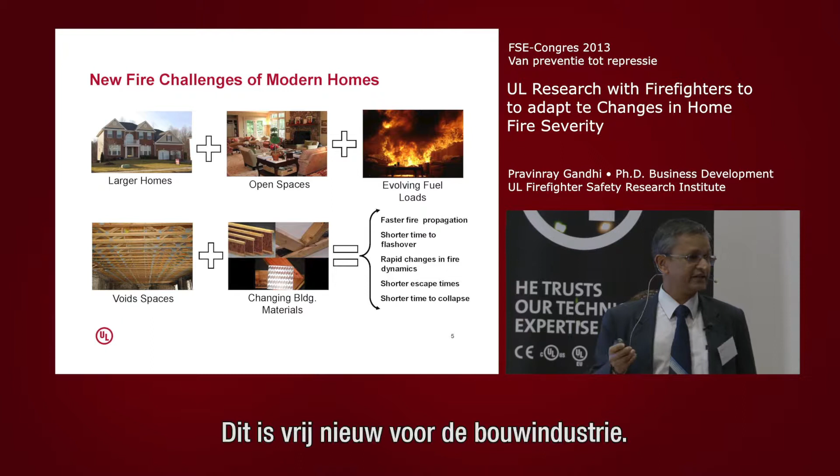So what is happening? Well, several things have happened in the last 15 years. This is relatively new for the building construction industry. It's not the iPhone in our timeline, but in our timeline it's considered to be pretty quick. In the US anyway, we are seeing much larger homes, more open spaces. So when you build larger homes, you try to create more open spaces, so you have the image of grandeur, for example.

The type of materials we have in the home is also changing rapidly. And again, the construction techniques are such that we have much more open spaces, so that if fire were to start, for example, in this structure, it can actually travel unimpeded by natural barriers you might have in your smaller contained rooms, from one end to another end, because you have all these open spaces.

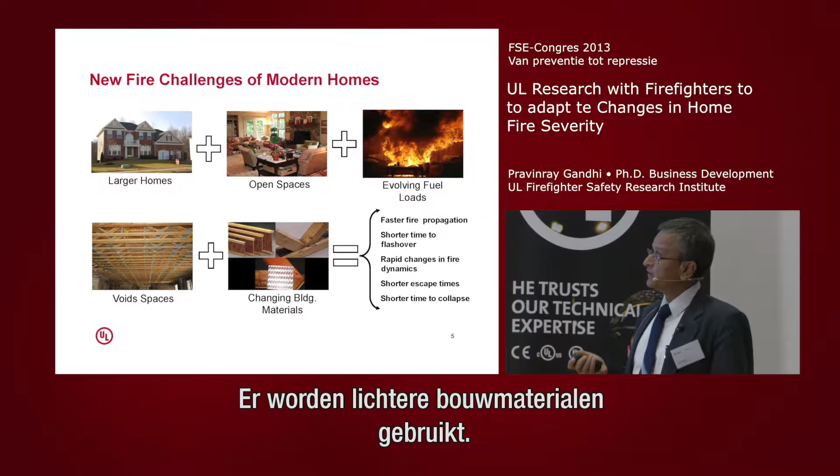And finally, we talked about changes in our construction method. We are going to lighter engineered products that are actually better in so many ways. It actually uses less wood, for example, for the same strength properties. In fact, they are lighter, so your transport load is less. So therefore, you're consuming less fuel transporting these pre-manufactured items to a job site. And that also saves fuel, and that's a great benefit.

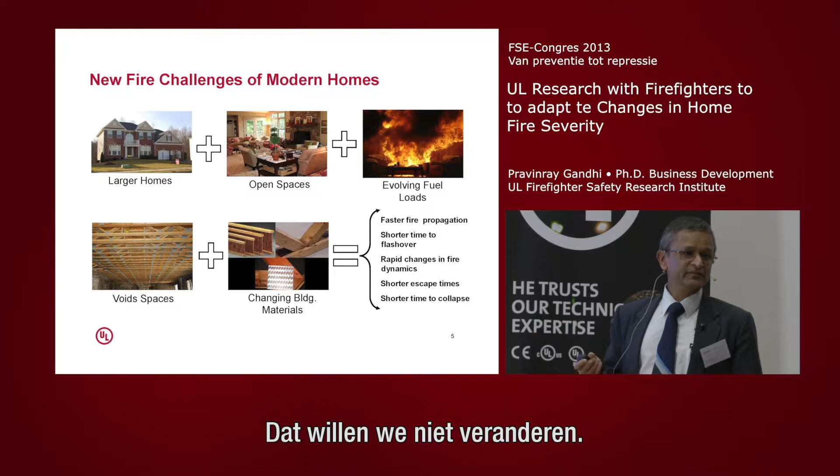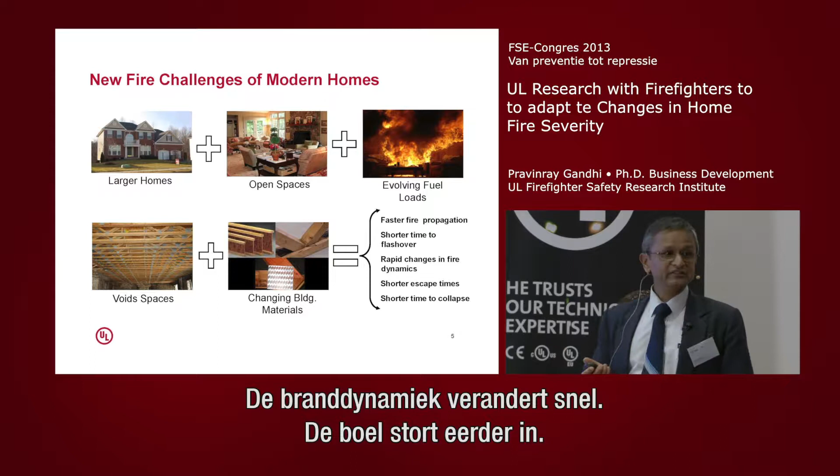So we don't want to change any of this, but we want to understand what it is, and we want to understand the impact of these changes on the fire service. So typically, we notice faster fire propagation and shorter time to flashover, rapid change in fire dynamics, shorter time to collapse, and these last two have a big impact on the fire service.

An idea of the size statistics. In the 1970s, typical homes were small, what we call ranch style, single-story homes, about 1,500 to 1,600 square feet. I remember when I first joined UL, one of my projects was to do risk assessment of homes in the US. This was back in the 1980s, and we were looking at home sizes of about 1,500 square feet. Today, you'll find homes are more like mansions.

Even for me, this is a big home, but this is turning out to be fairly common in many parts of the US, to build big homes. Smaller lot size, but big homes on the same plot size. Getting to be more than 3,000 square feet now on average, which is a pretty significant change.

Now, how does that change things? Well, for one thing, you have more air available than you had before. So even when you have a fire, the fire doesn't become ventilation controlled that readily, but it can grow. It can become much bigger before it becomes ventilation controlled. So that's a change in fire dynamics that comes out of having a larger home.

Some typical floor plans. I show that only because I wanted to show there's this concept of a great room in the US these days, where as you enter the home, you have a very tall atrium space. Your ceiling is about 17, 18 feet high. When you get in, you feel, wow, you come into a Hollywood mansion, right? And that's the impact I think the builders are trying to give the building owner. And then also the rooms are relatively larger because the overall floor plan is bigger.

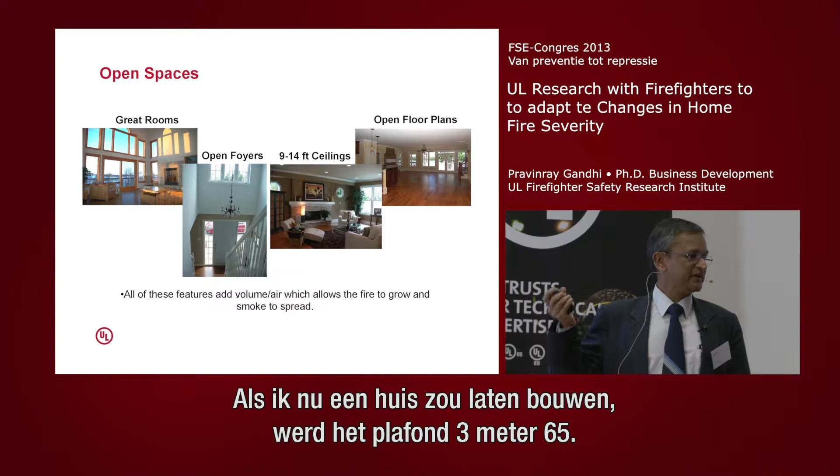Some examples of photographs of what we're talking about: great rooms, high atrium spaces, open foyers, 14-foot ceilings. I've seen it's very common, 12-foot, 14-foot ceilings. My home is built with 8-foot ceilings because it's a 1984 home. If I were to get a home built for me now, it'll be about 12-foot ceilings, okay? Because that's what the builders have built for you. And it looks good, so that's how you build it.

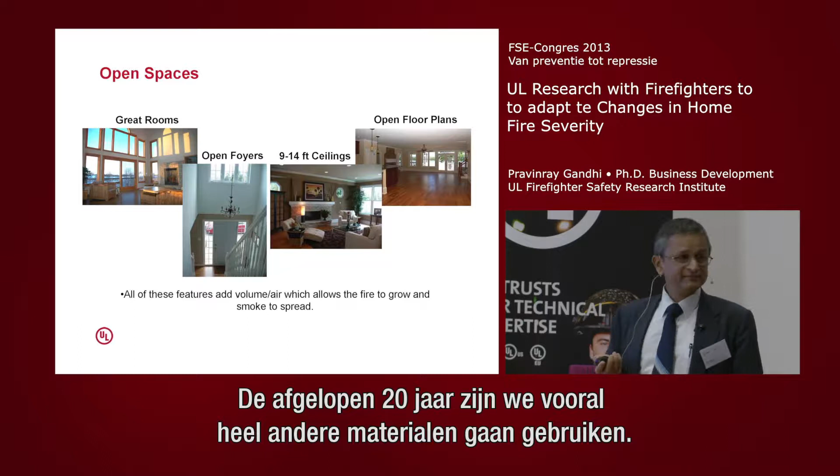And big floor plans, big floor plans. But one of the biggest changes in the last 20 years is the materials we use. And I kind of use a clip. How many are old enough to have seen this movie called The Graduate? Okay. So you'll remember this scene. It's very important for us because its consequences are amazing.

What are you going to do now? I was going to go upstairs for a minute. Oh, I meant with your future, your life. Well, that's a little hard to say. Ben. Excuse me. Mr. McGuire. Come with me for a minute. I want to talk to you. Excuse us, Joanne. Of course. Thank you. It's just I look at him and I can't believe it. I just want to say one word to you. Just one word. Yes, sir. Are you listening? Yes, I am. Plastics. Exactly how do you mean? There's a great future in plastics. Think about it. Will you think about it? Yes, I will. Enough said. That's a deal.

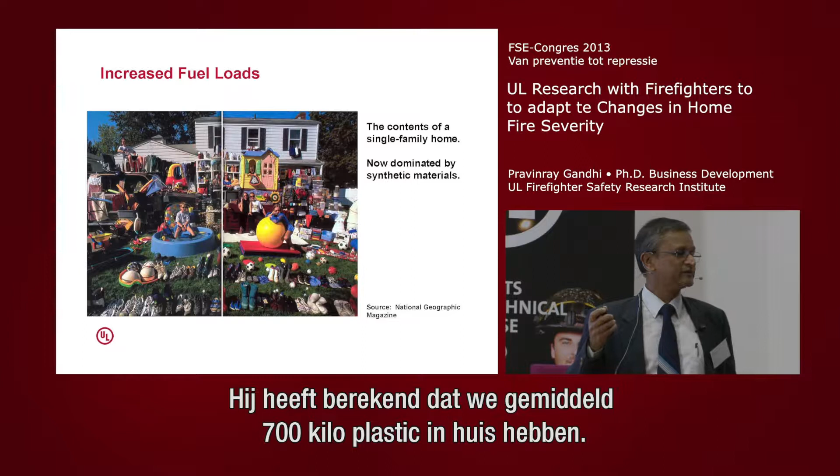Plastics. I wish I had connected the dots in 1968 when I saw the movie, because then I would have understood what's going to happen. That's what we have in our homes these days. In fact, we have a fire service friend near Northbrook, and he calculated, I don't know how he did it, that you would typically have about 1,500 pounds or 700 kilograms of plastics in your home. Think about sofas and carpeting and clothing and everything you have. Everything has got synthetic materials in it these days.

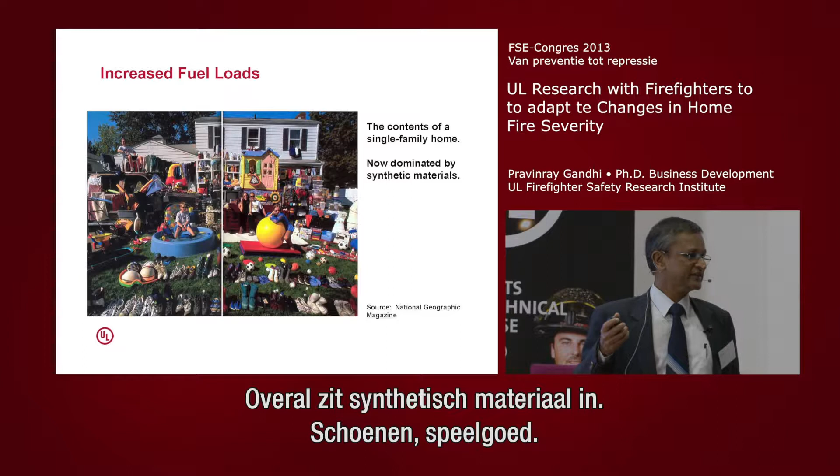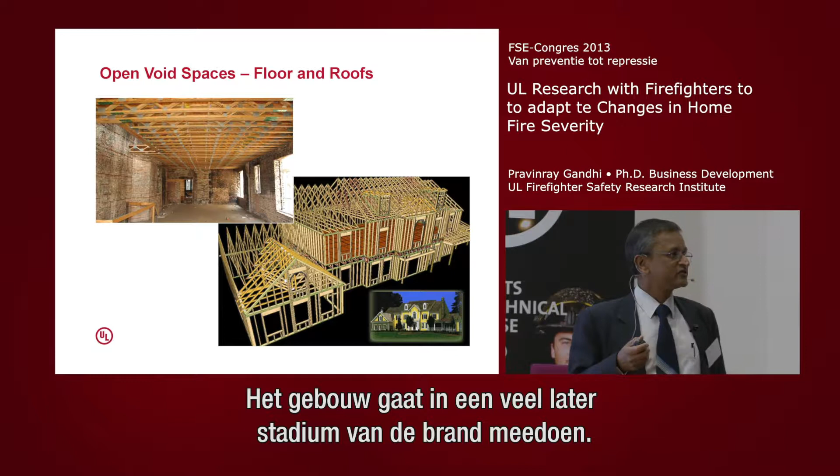Shoes, toys. You can't buy wooden toys anymore in the US. It's hard. You have to actually special order wooden toys in the US. They're all made out of plastics. So this is a graphic from National Geographic magazine, which is very nice for us because it shows what we're dealing with at home. And this is all we would consider as a fuel load. In case there was a fire, what's going to burn is actually this. The structure gets into the picture much later in the fire.

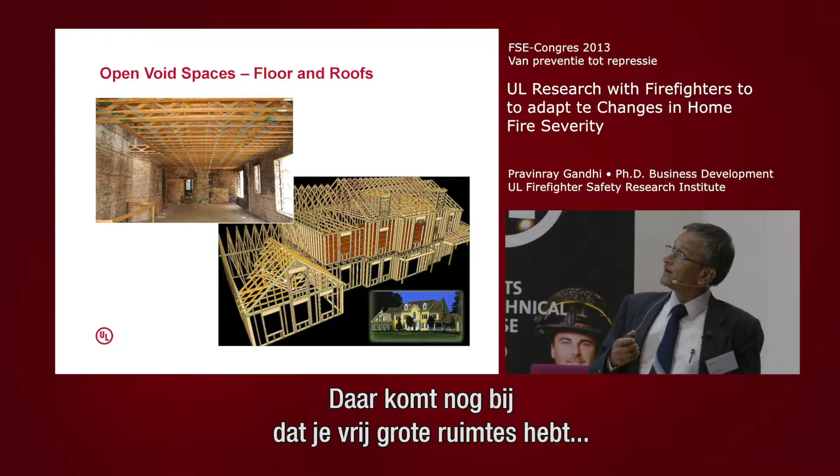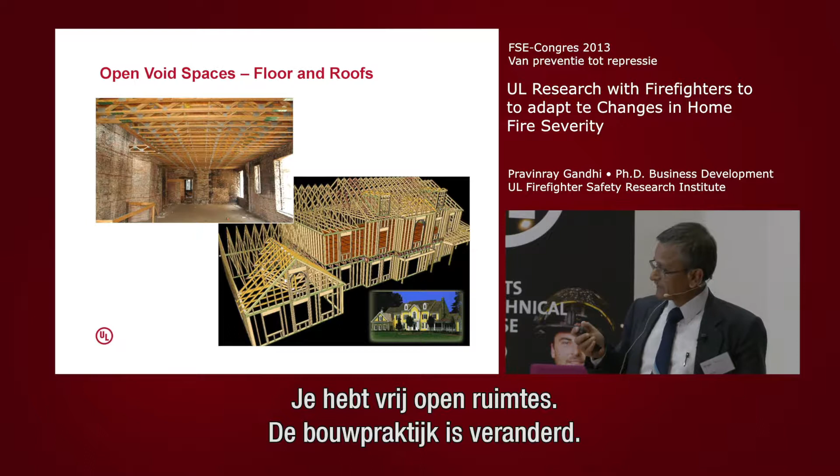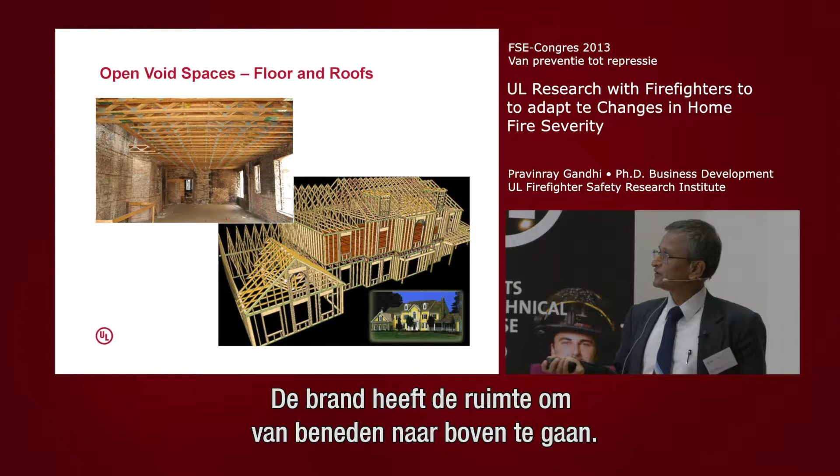And then in addition to that, you have these pretty large spaces where you're going to put all your plastics in, all your furnishings in. You have fairly good open spaces. In fact, the construction practices have changed. We used to have horizontal barriers in the home. Well, no more these days. In fact, there are spaces available for your fire paths to go from the bottom, if a fire were to occur here, to the upper floors.

And then what is happening is changes in our other construction. The sheathing materials are changing, outer materials are changing, for many reasons. One of them, obviously, is energy efficiency. As you want to make homes more energy efficient, you are going to use insulating materials on the outside so you get more thermal insulation and keep the heat inside, or the cold inside, depending upon the time of the year.

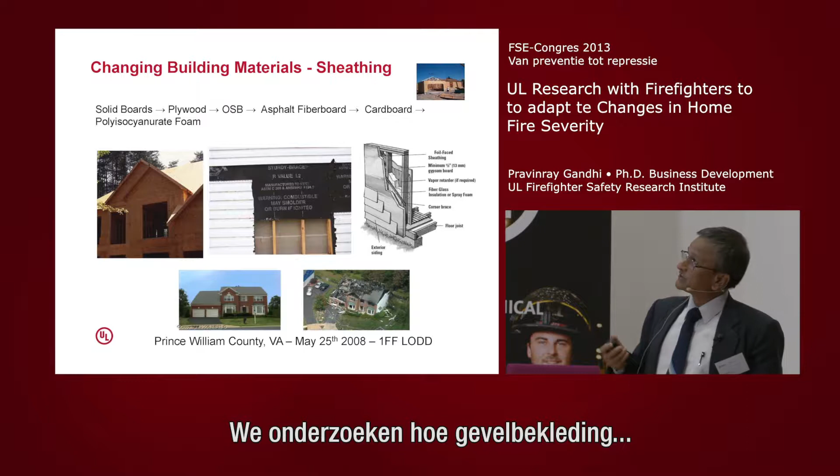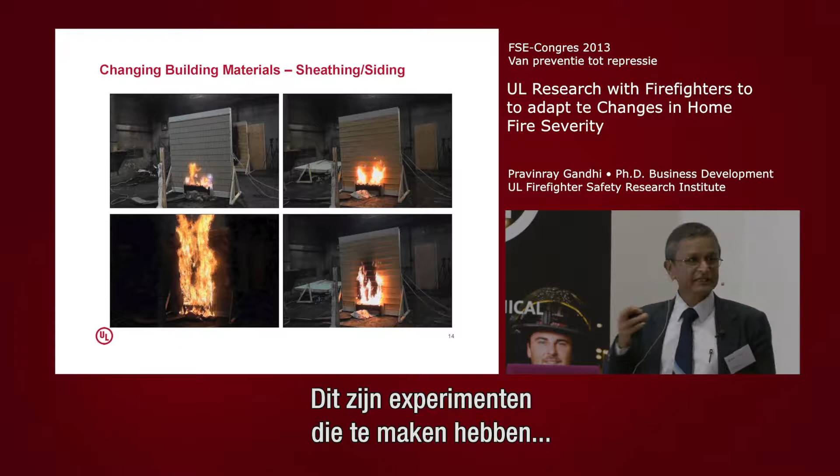And we are doing some research in that area to understand how sheathing materials may impact fire growth, especially exterior fire growth. And these are the series of experiments. I think they're linked to the attic fire project that we are starting to work on right now, because these fires from the outside would then end up in your attic space.

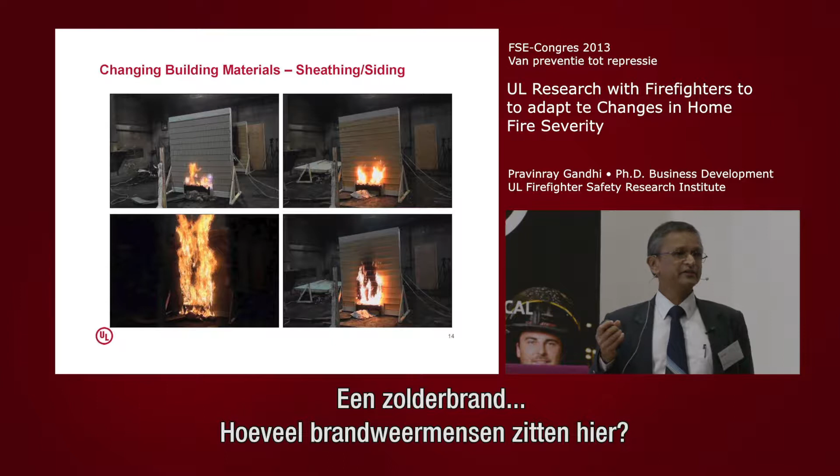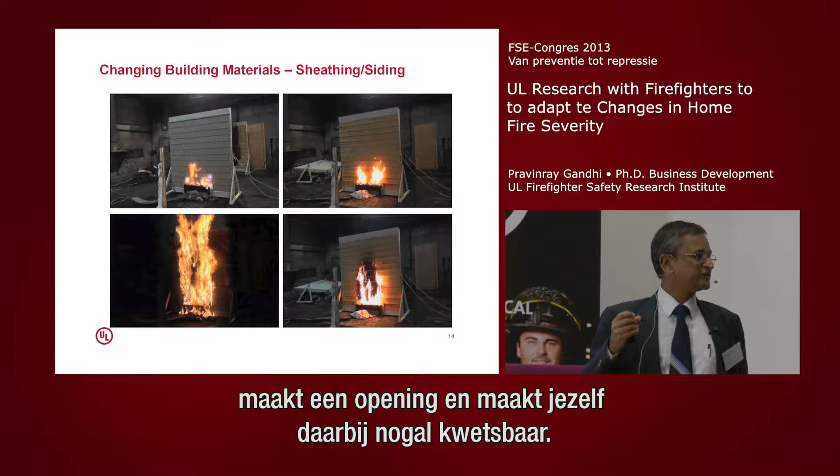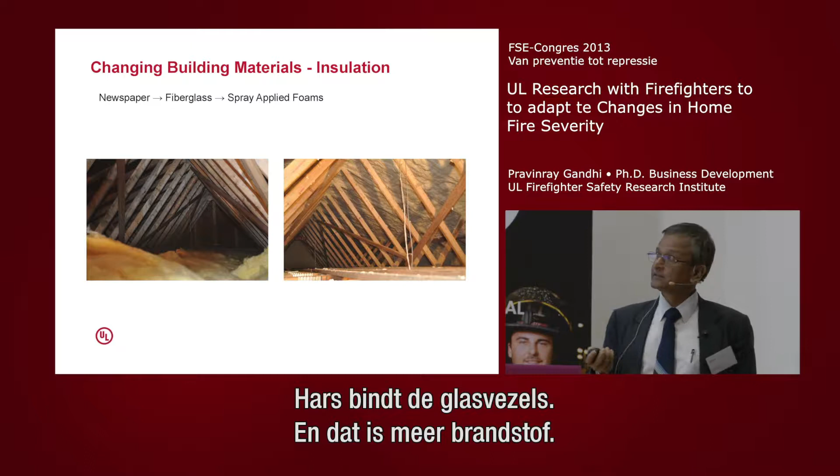The attic space fire is probably, I don't know how many firemen you have here, one of the harder fires to fight because you've got to go on top of the roof, cut an opening, and make yourself pretty vulnerable in that situation, and then you put water in the attic space. So it's a tough fire to fight, and we are seeing that now. More insulation in the attic space. Again, this insulation, even though it may be fiberglass, what binds the fiberglass? Right? You have a resin material that binds the fiberglass, and that's just more fuel. And that's what you're seeing right now.

In 1871, Chicago had a very bad fire. Everybody remembers the big fire of Chicago in 1871. Okay? That destroyed the city. That was a wind-fed fire that went from building to building and destroyed most of the city of Chicago. Okay? We are seeing those kinds of fires occur now in our suburbs, not in the city, but in the suburbs, because of the way we construct our homes.

So we have many projects that we're working on that actually hit on the increased severity of fires. I covered some of them in the morning, so I felt maybe I should do something different for the afternoon session because you were all there for the morning session. So I picked a few projects for us to discuss as examples of the research that's going on to develop data, create a base of knowledge that the fire service can use.

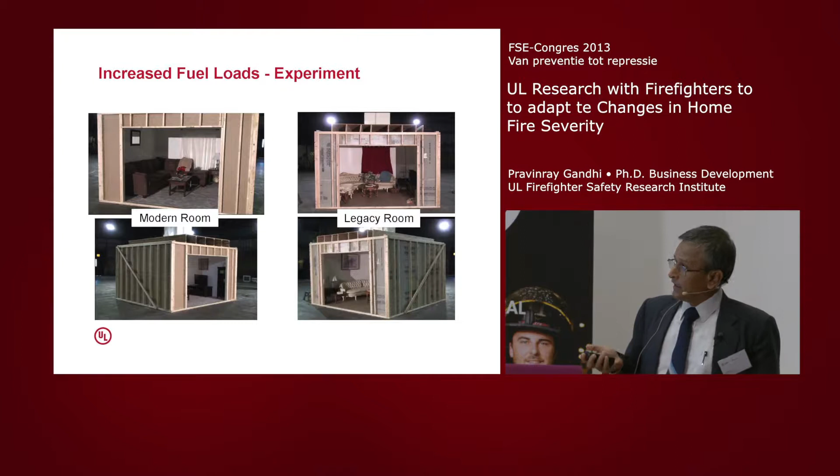Many of you may have seen these videos and the tests that we had conducted. We call it the modern room or contemporary room, where you have plastic materials, couches and carpeting and curtains, etc. And then we have what we call the legacy room, where you use mostly natural materials. Very hard to find, by the way. To find a couch like this that's made out of cotton, for example, is not easy.

You have to go to some antique stores, and then you have to make sure that indeed they're selling you the stuff you want to use in a fire test. But once we do this, we actually acquire a number of pieces at the same time, so we have similar samples when we want to do identical types of testing.

And what you find when you do this testing in the different room sizes is that when you use natural materials, you get flashover time in about 30 minutes. This is what firemen in the US were typically trained to understand. You've got 30 minutes to go out there and put out a fire before you get flashover. Well, with modern furniture, the time is really reduced to about 4 minutes.

So by the time the fire service is able to respond to your home, in many cases when you have content fires such as furnishings, you have reached flashover conditions. So they're actually addressing your fire at a point where it has become very dangerous. It's now going to be progressing into structural fires. They will think about protecting houses next to the building the fire is in, et cetera. They have to protect the people around, evacuate people around it. And so it's a much more difficult problem than they had before.

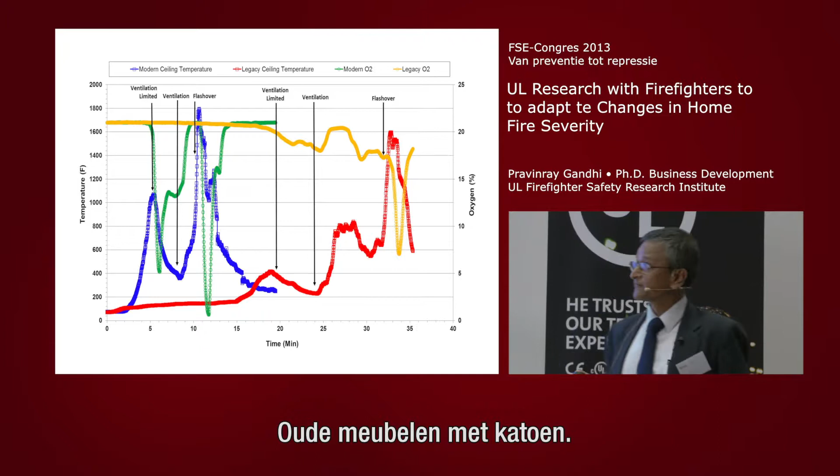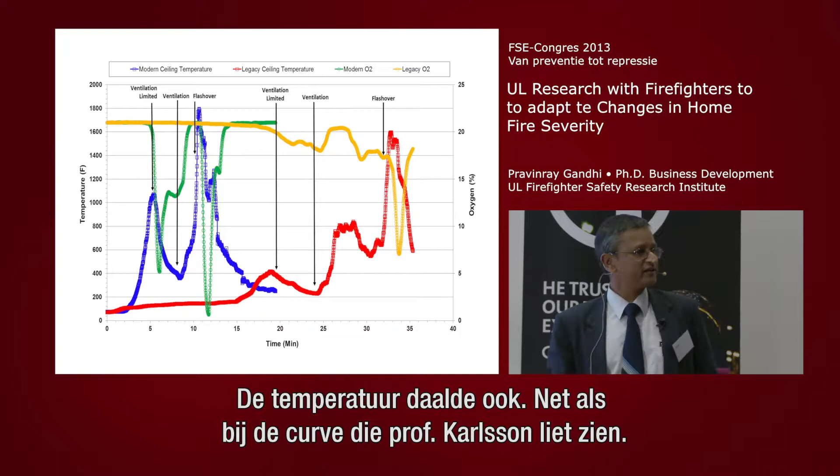Okay, so what does the data show us? This is, in my mind, an interesting part of understanding what we saw quantitatively. So the red line is the ceiling temperature in your old furniture, cotton-based materials. At about 20 minutes, you had ventilation limited. You saw the fire come down. The temperature also comes down, very much like the curve that Professor Björn Karlsson showed in the morning.

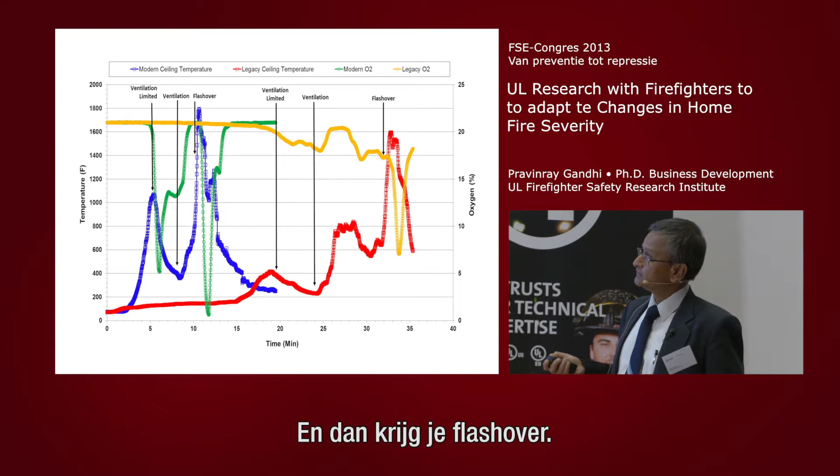And then you open the ventilation, and you get reignition, and then you get flashover. But that takes about 30 minutes to get to flashover. In this case, you get a ventilation limited condition in about 5 minutes. You let it sit for a few minutes. You open the ventilation, and very quickly it comes to flashover.

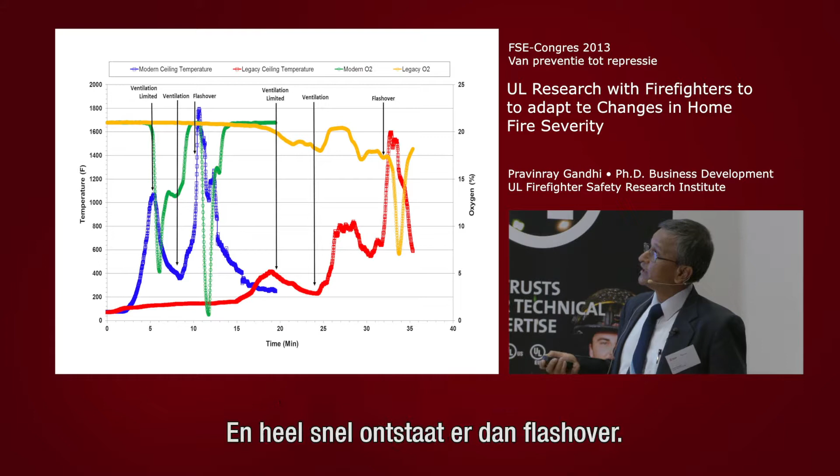Okay. What is the first peak after the ventilation? The temperature rises and then drops again before flashover. This one here? On the red line. Oh, this one here. Yeah. It's still burning. It's still growing slowly, the fire. Why does the temperature decrease?

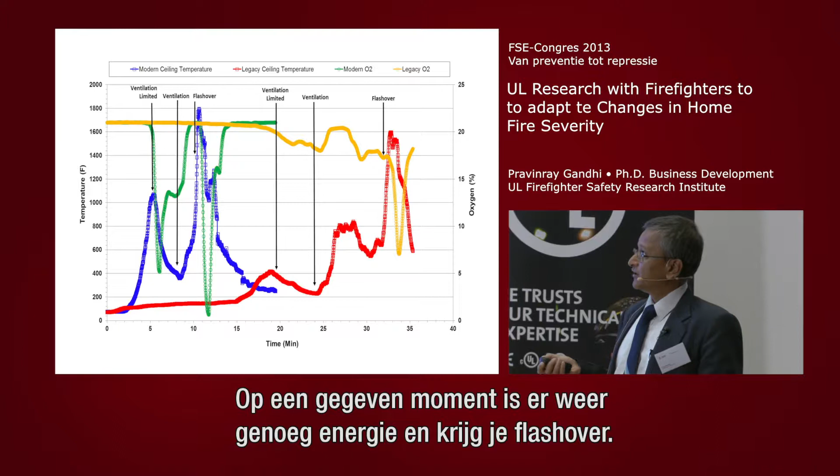Oh, I see. I think it's just balancing out the oxygen. It's just getting more oxygen. You'll see it in the video if you look at it. The hot gas layer at the window is starting to drop. So you're getting less oxygen, and then at some point you get sufficient energy back into it again, so you get flashover. Good question.

But another thing I wanted to point out is the oxygen concentration in the room. In the modern room, 13 to 14% oxygen concentration is when you have indication of a ventilation limited condition. That's a point where there's not enough oxygen to support combustion. This is fairly well known: if you want to put out a fire, you reduce the oxygen concentration to about 15%, and you can actually kill the fire just by reducing oxygen concentration.

You'll see the same thing happen in the legacy furniture. So if you look at the data here, you get ventilation limited at about 18%, and you see that the combustion ceases out here. That probably may be related to the materials being used in this particular product, the cotton-based materials.

The difference between the two tests is this time to flashover, which is almost a 20-minute difference. So if you can get 20 minutes back into the structure, that could actually protect the fire service significantly.

The problem is that when we started adopting photovoltaic panels, the fire service was the first one to say, you know, we don't understand the hazard you're asking us to address when you come to these events. So in many cases, in the initial cases, they actually would come to the event and they had to struggle to figure out how to attack that particular fire because the photovoltaics is energized, there's power running to it. There's several challenges to it.

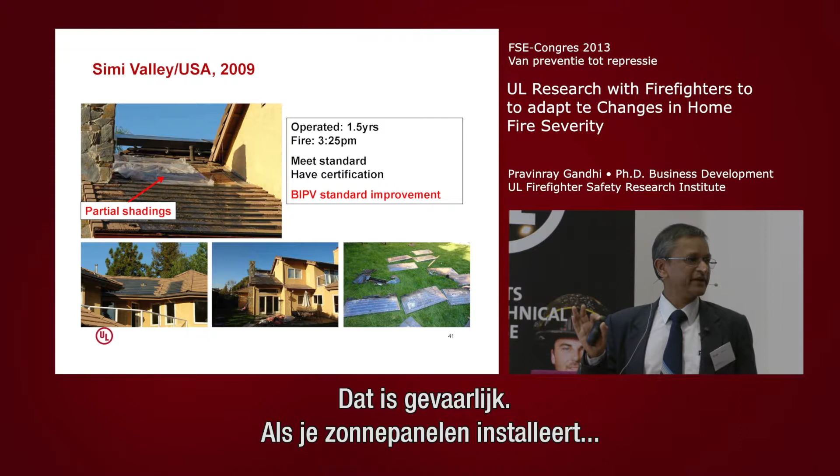In this particular case, the installation was such that there was partial shading of the photovoltaic panels, one of the more dangerous things to do when you install photovoltaic panels. You want to make sure that it is not in partial shade. When you have partial shade, there is localized heating that occurs in the junctions of the electronics, and that causes overheating and ignition. It's happened several times, so people now know not to do this. But if you have a home, you built it, did not know this, you installed, you want fire service to come and protect your facility.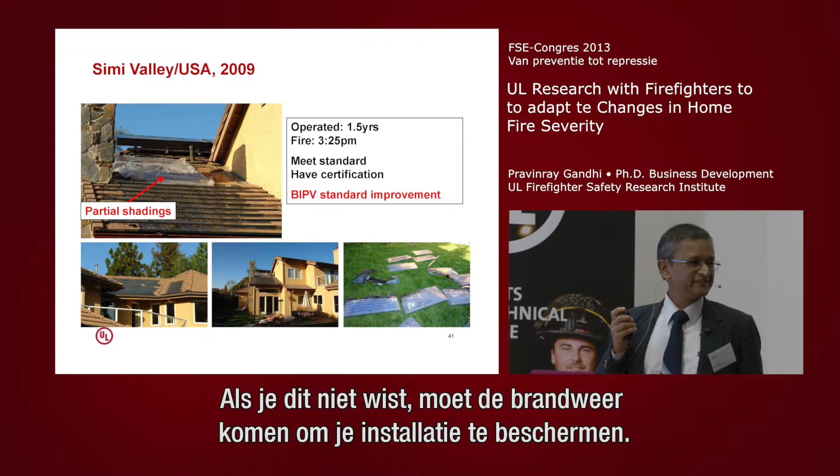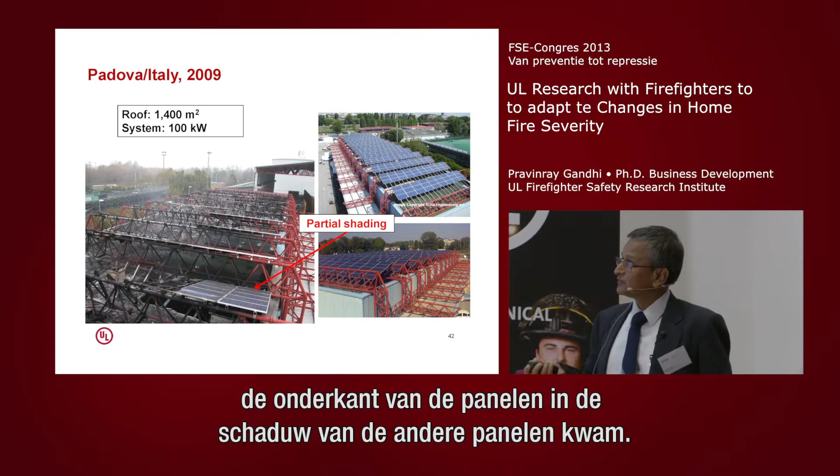This is a system in Italy, a 100 kilowatt facility. This also was actually not installed properly in our view because the angles of the panels were such that at a certain point of the sun, the lower panels were partially shaded by the panels in front. And that caused a very large fire. It destroyed a significant portion of that facility and the roof system.

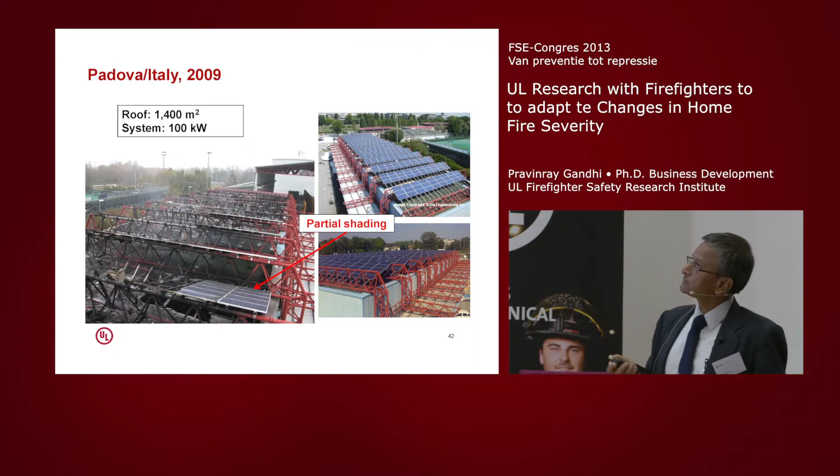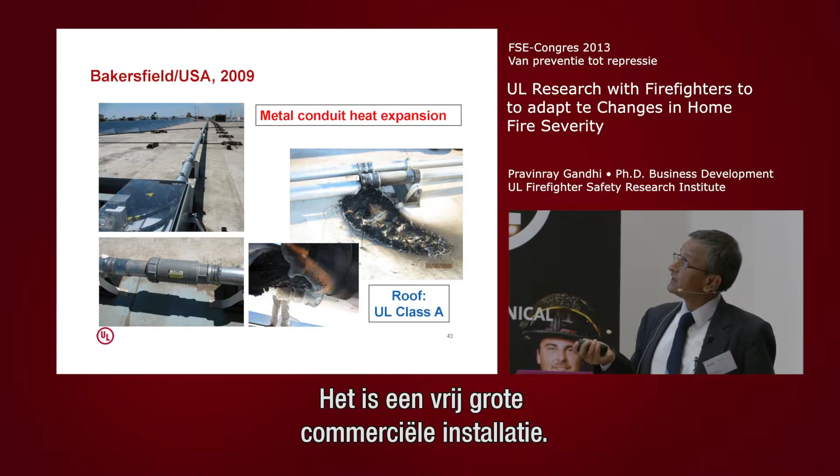This is the Bakersfield. You saw the fire chief talk about it; he was talking about this facility. It's on a commercial installation, a fairly large installation, but it had to do with installation again. This particular power cable in a conduit was not aligned properly, and it caused localized arcing, and we had destruction of a few panels in this case.

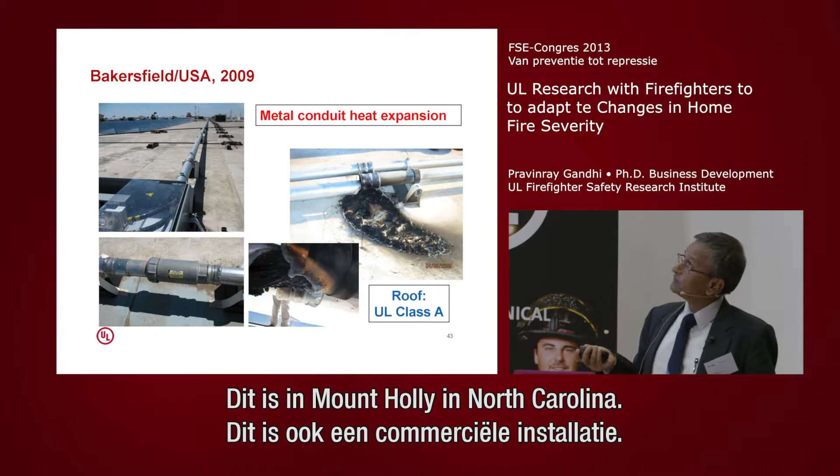But many times during installation or inspection afterwards, you don't notice every single piece of wiring. But the fire service people have to respond to this. So what do they have to do? What are the challenges they face?

So as these incidents are coming to light, we decided that we'll investigate this problem in greater detail. The biggest issue that we were worried about, especially from the fire service feedback, was the issue of electrical shock hazard. It's not fire hazard, it's electrical shock hazard, because you're going to put water on something that is energized. Or you're going to have wet gloves, wet shoes, you're going to climb on top of these things, and you are going to be somehow grounded and get electrical shock.

And there are several questions about what do we do when it comes to this. Now that the roof is being covered by photovoltaic panels, there's less space available for them to maneuver themselves. When we adopt new technologies, we don't consider those side effects of our installations. We want to cover as much of the roof as possible because we generate more power. But what will the fire service do if they have to go on the roof? Is there a space for them to walk around?

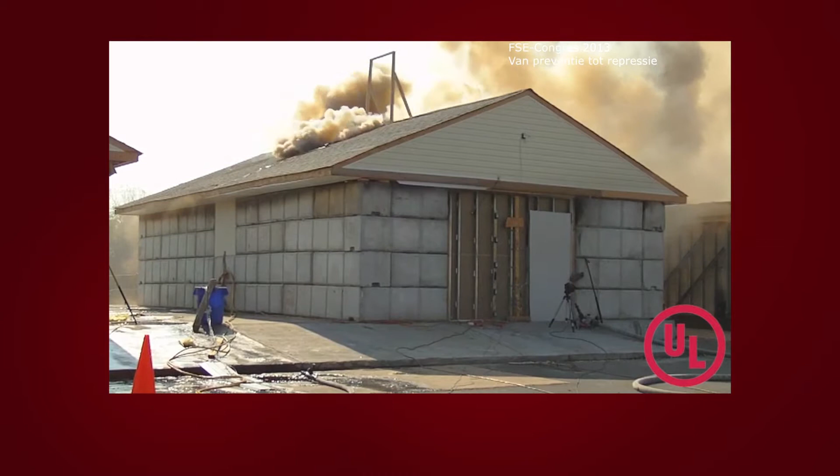This is interesting. I'll rerun this again, but I would like you to watch this video. This is a video on ventilation and the power of ventilation. So as you know, it's an attic fire. We put a small crib in the attic, ignited it, and we wanted to see what kind of fire we could get. The whole attic space as well as downstairs is closed, so the only available air is what is in the attic space.

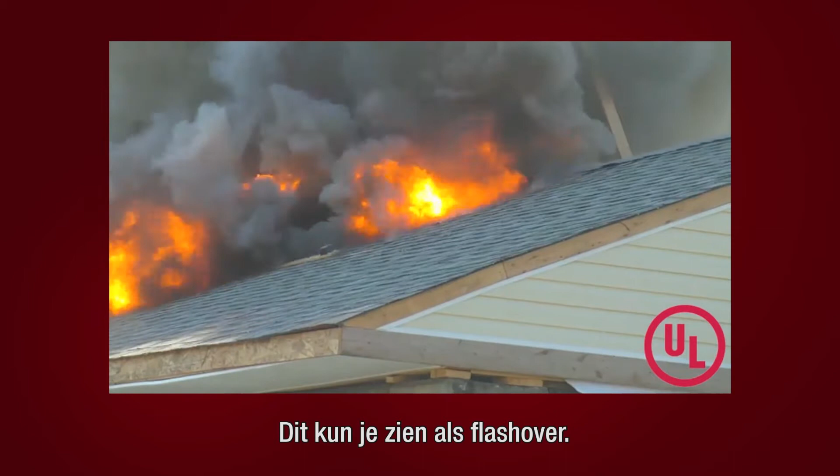That's some of those members, I think, cracking inside the attic space. So you can think of this as flashover, right? Okay, so it put itself out. When it ran out of oxygen, it put itself out. It seemed like a severe fire.

One thing I did not tell you about this particular test is that there is no opening on the roof. We had cut a 4-foot by 4-foot opening for doing other experiments, but for this experiment, we put a piece of plywood over it. That's why you see the smoke coming out from the ends, shooting out from that angle. It's not coming vertically out as you'd expect. It was a complete closure. So the only air available in this test was in the attic space.

There's no more, and I guess other air that may have leaked inside as it was trying to muscle through the roof system. But you can see the power of this fire. And yet, you remove the oxygen away from it, it self-extinguished. So this is very interesting for us to study how ventilation affects fire dynamics.

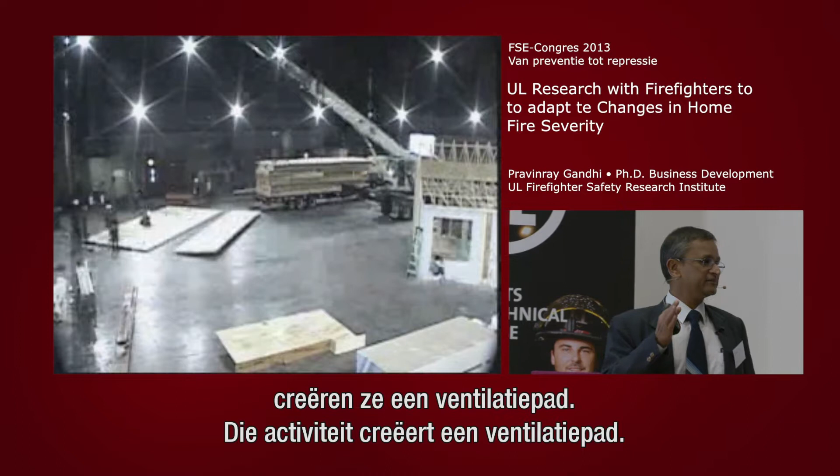The importance of controlling the ventilation, I think the key point here, is that when fire service personnel are entering the front door, they're actually creating a ventilation path. That activity itself creates a ventilation path. So what's the consequence of a ventilation path? It's going to add air, therefore it's going to restart the ignition process, add air into the combustible fuel. Temperatures are going to increase, as we saw earlier.

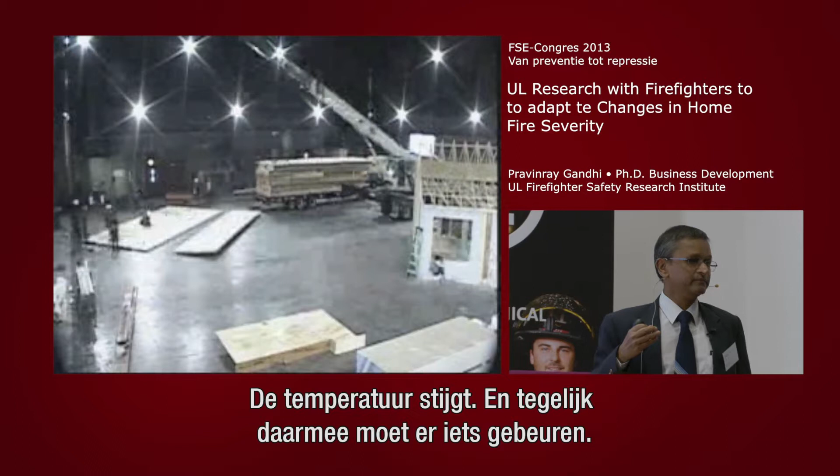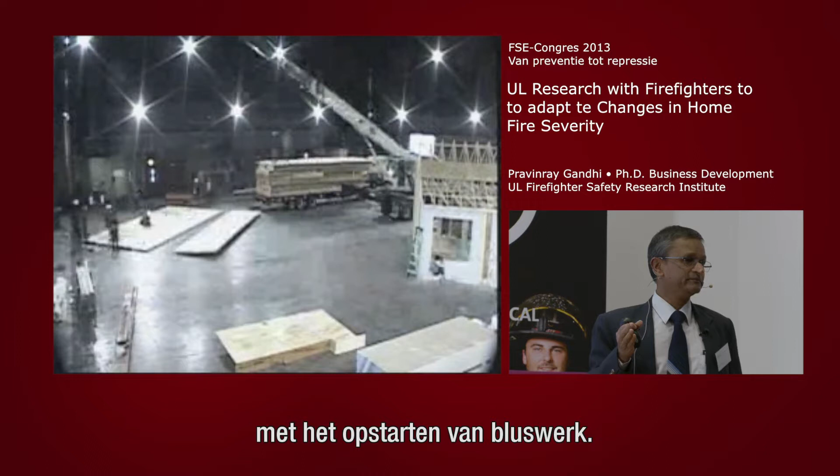And something else has to go with it. Again, what we found is that you have to coordinate the opening of the door, or controlling the door space, by starting your suppression line at the same time. If you did not do that, then all you're doing is feeding air into the fire, therefore making the fire go bigger.

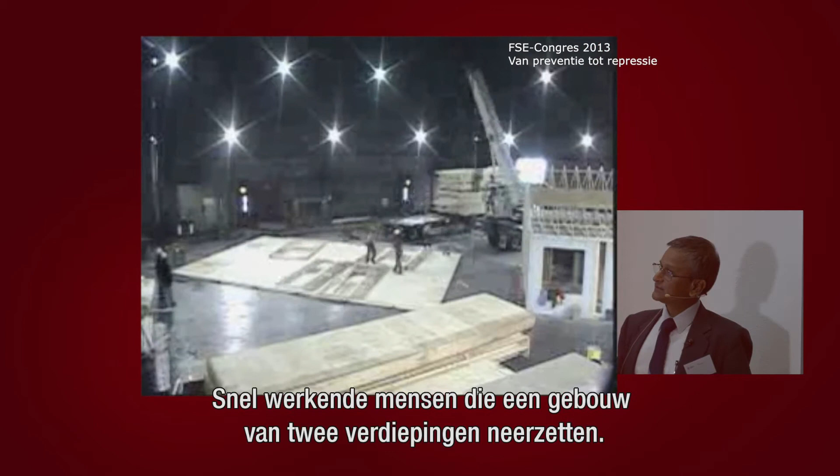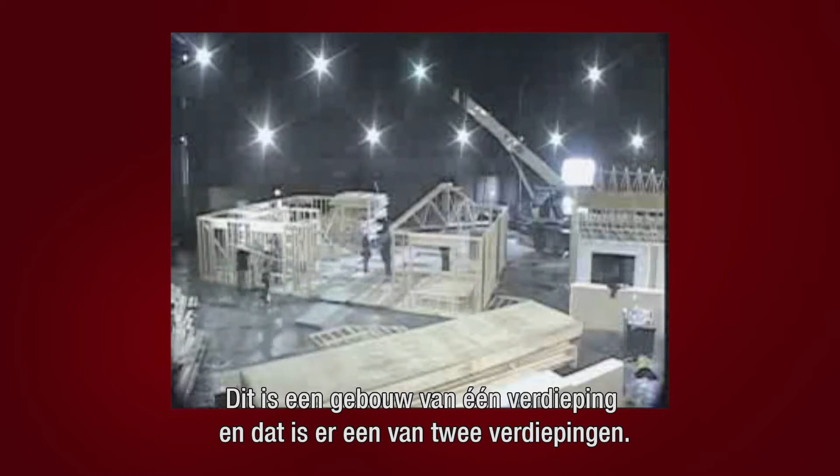Okay, these are very fast individuals working in a lab building a 2-story structure. I'll just let it run for a couple of minutes, because then you can see how these structures are being built. Again, this is a time-lapse movie. The whole building took about 2 weeks to build in the lab. Also, just want to point out that this is a single-story structure that we use, and that's a 2-story structure. The whole 1- and 2-story structure fits inside our large fire test lab.

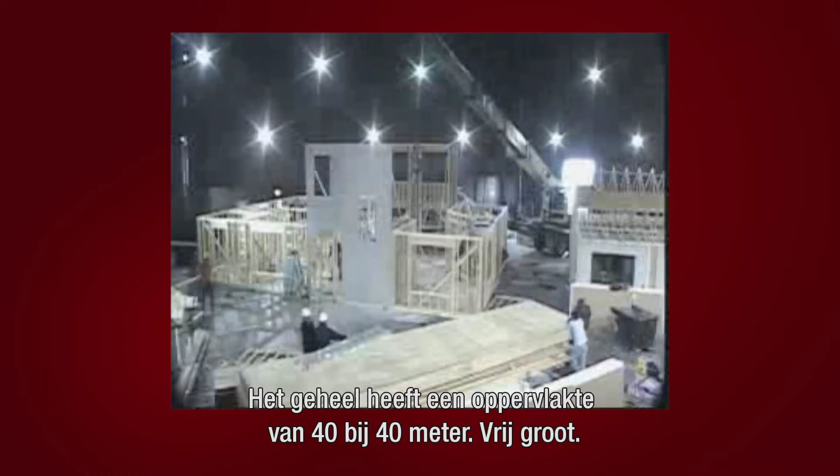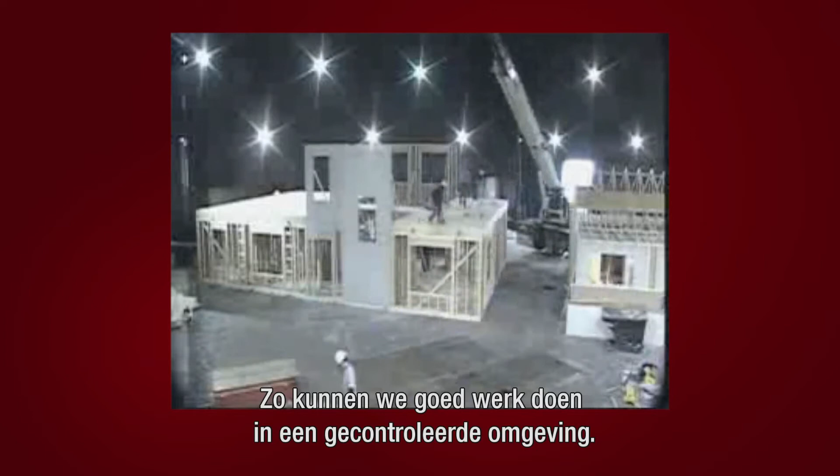It's like a 40-meter by 40-meter square area, so pretty large, about 60-foot ceiling space, so very large ceiling space available. It allows us to do very nice work in a very controlled environment. The beauty of these experiments is that we can control the variables.

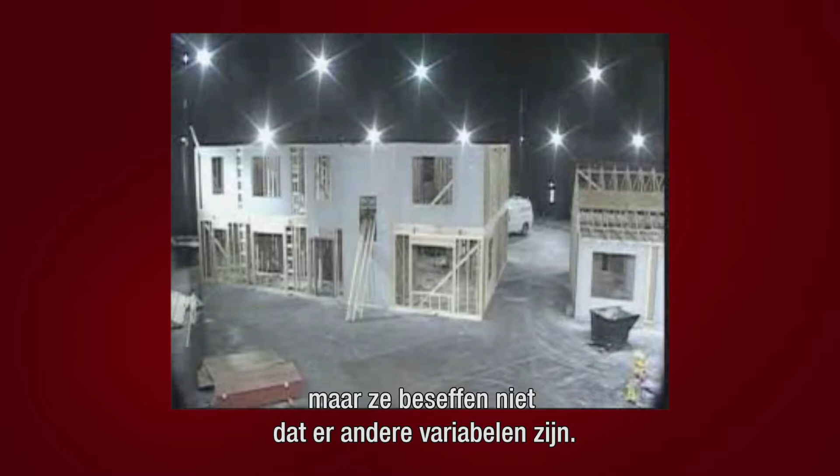Now, when the fire service goes in the field, their experience is based on one-off experiences. In other words, they might see something, they think it's important, but they don't quite realize there are other variables connected with it. What we try to do here is reduce the number of variables in our testing so we can really understand the consequences of various important firefighter tactical moves that they make during a fire event.

The building itself, while it's made of wood structure, you see the outside skin out here, that's non-combustible material. It's more like a cementitious board, so that we can do multiple tests. Now, each of these structures, probably we can do about 20, 30 tests.

Inside the building, we lined it with gypsum wallboard, 2 layers of it. One of them is sacrificial, so if it gets damaged during a fire test, we can very readily replace it so that we can do a retest very quickly. And we can do 1 test a day in this structure and 1 in this structure.

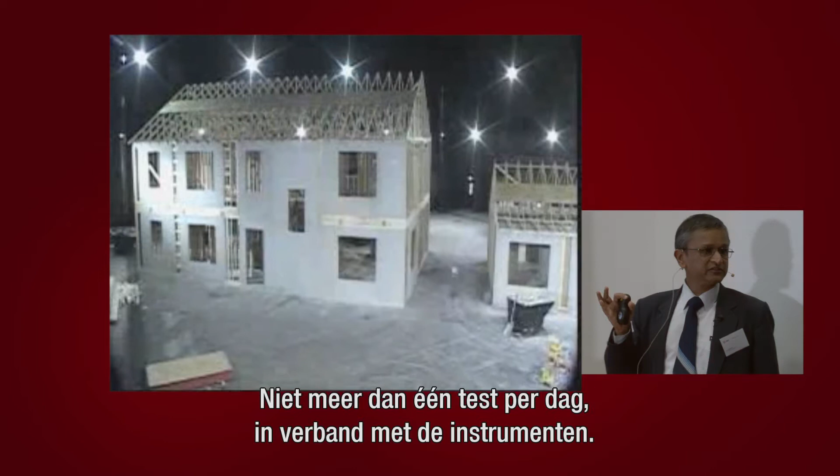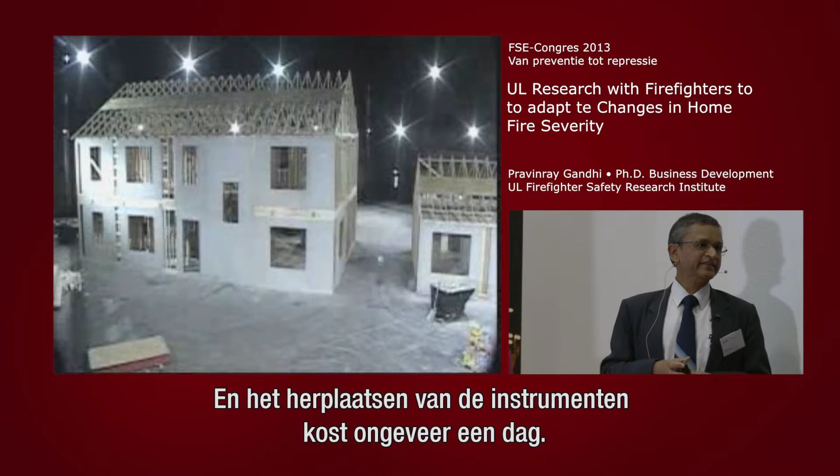The reason for only about a test a day is because of instrumentation, because in the fire test, the instrumentation does get damaged or they get displaced because of fire service activity, and therefore we have to relocate the instrumentation. That takes about a day for us to do.

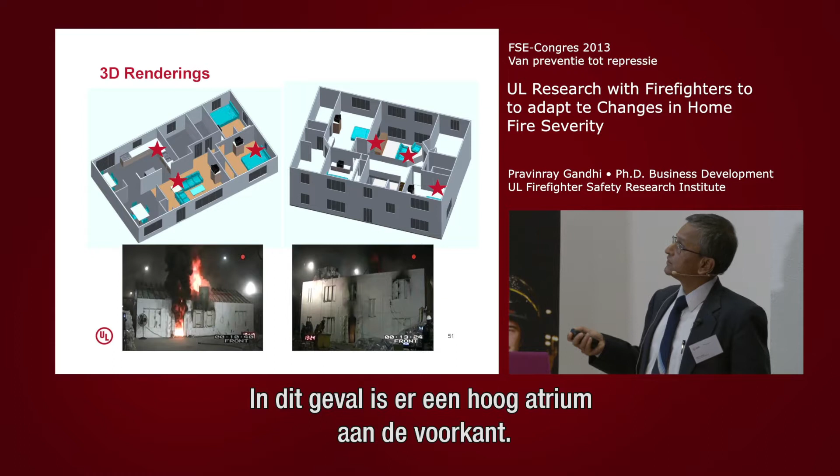Inside the structures, this gives you a 3D view of what the structures look like. Out here, in this particular case, there is a tall atrium space in the front. This is a very typical, I would say, relatively small ranch house in the U.S. Very similar, very typical structure of the ranch house.

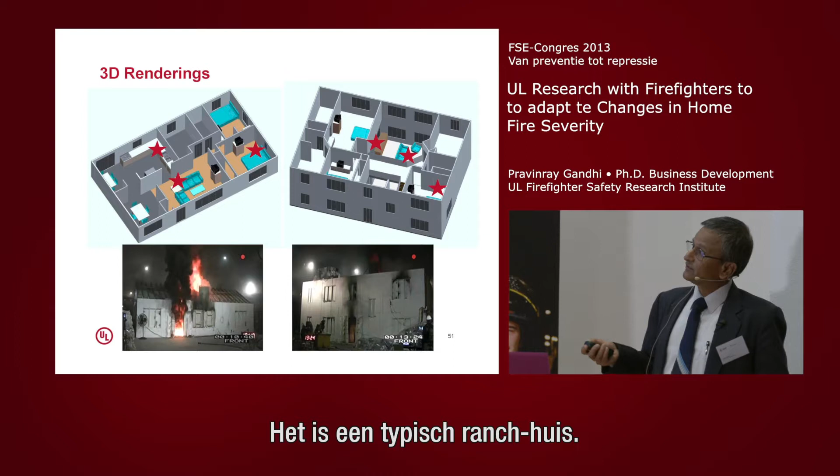And the various, how it's furnished in the bedrooms, living room, typical furniture you would find, kitchen. We also get some appliances, cheap appliances to put in there, because many times they have insulation, that can burn also. So it's part of the system. Fair amount of instrumentation goes into it.

When you're measuring temperature, each room is instrumented with thermocouples vertically, as well as in key strategic locations. We measure gas concentrations in the key rooms where fire events are going to take place, or in adjoining spaces. In most cases, we will have oxygen, CO, and CO2 analyzers, which are very easy to deploy. They are standard gas analyzers. But when we do something more sophisticated, we can have extractive FTIR included into it.

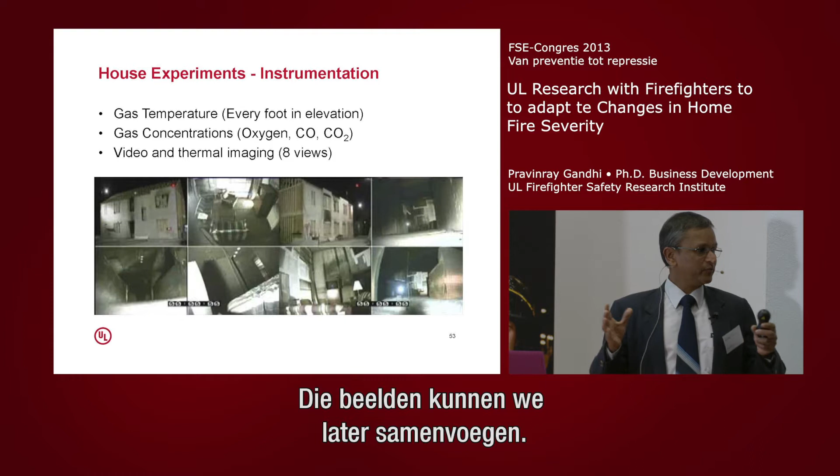And then, obviously, all our tests are video imaged. We have 8 views that we can show at one time and put together, so you can look at the fire from various angles at the same time.

Here's a one-story experiment that we conducted. I'll show you some data, where we started ignition of a sofa and a bed. What we'll do typically when you do these experiments, at some time we're going to ventilate. So the fire starts, we close it up, we let it go under-ventilated, and at some point we're going to ventilate. And then we'll allow fire service people to say, okay, what are you going to do now?

Here's your protocol. You got to wait for 2 minutes before you open the doorway, but you want to control the doorway so that you can apply the hose stream, or open the doorway and open 1 or 2 ventilations to see where the fire progresses. And then we collect data throughout the building structure.

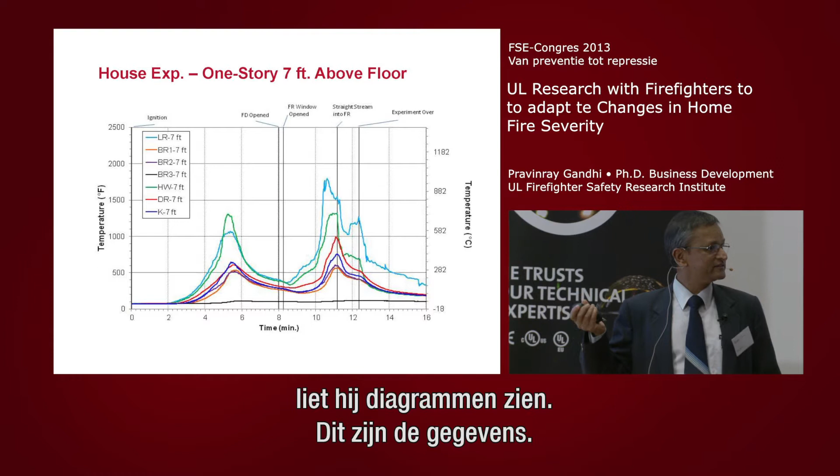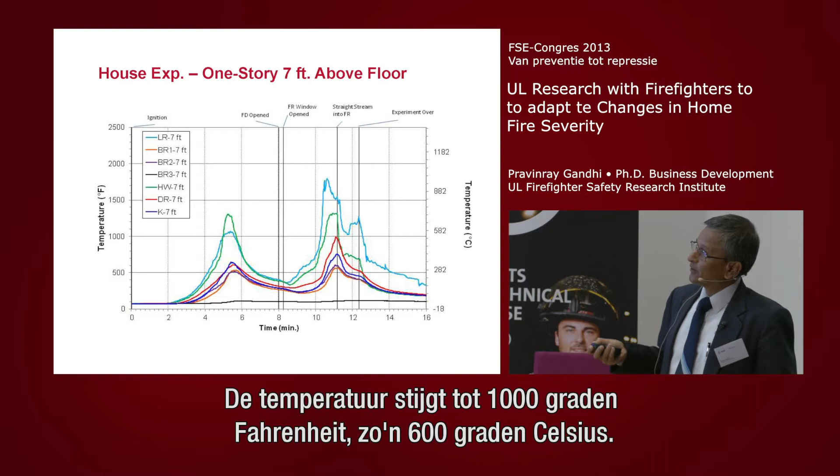So here's what the data looks like. Again, it's very interesting. As I was listening to Bjorn Carlson's presentation, he's showing these graphs. These graphs are actual data. So in this particular case, we're monitoring temperature 7 feet above the floor in this room of fire origin. And you see the temperature go up to about 1,000 degrees Fahrenheit, about 600 degrees Celsius.

It becomes ventilation controlled. Temperature goes down. You open the front door at this point, and then you open a fire room window. So you have 2 ventilation paths now. And the fire quickly grows into flashover conditions. And then the fuel dies down and the fire dies down.

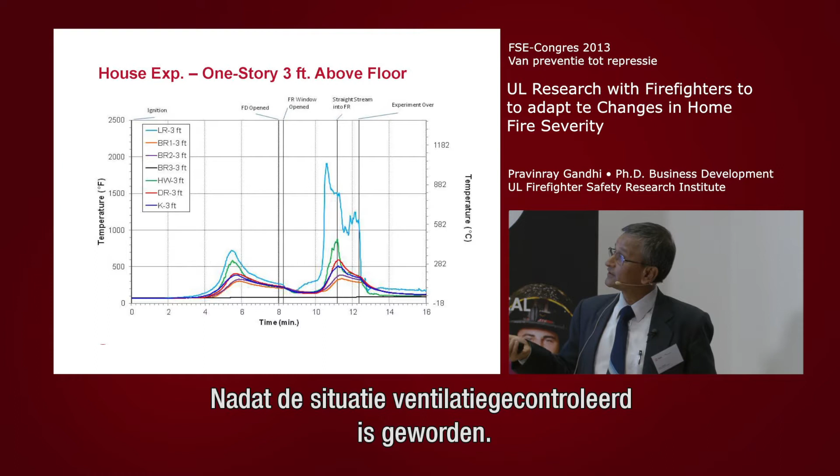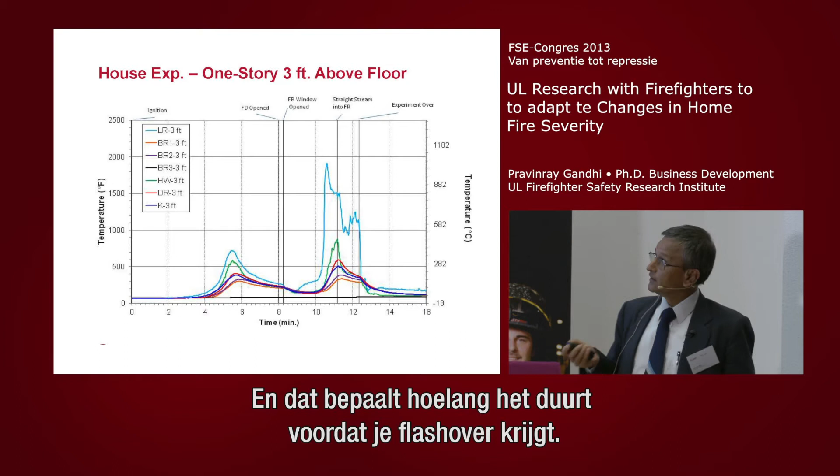So what we have really proven is that even though you may change the scenario and the timing, you may have the door open a little later after it's become ventilation controlled, you'll get the same effect afterwards. And it depends upon how you affect your ventilation, which doors and which windows you open. And that is reflected in the time by which you get that flashover condition to occur.

You're talking about flashover, and you can see that it is a flashover. Were you afraid that it could be a backdraft? This is flashover, yes. This is not backdraft. Were you afraid that there could also be a backdraft at that moment?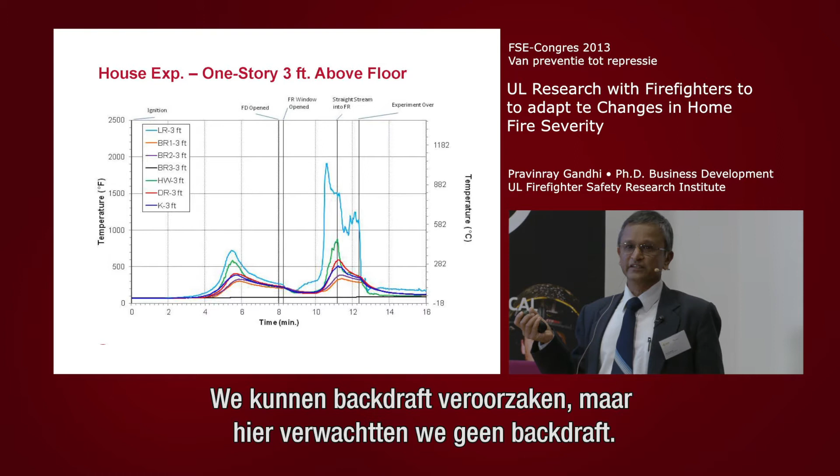Or can you influence it in the test? We can probably create backdraft, but no, in this case, we did not expect backdraft in our experiment. But why did you not expect that? Because the type of fuels we are using, we really know them very well. And we have done this experiment so many times. And so that experience tells us that we should not expect backdraft in this experiment. It's a good question. I mean, I think for practical, for developing our safety procedures, it's a very good question that you asked.

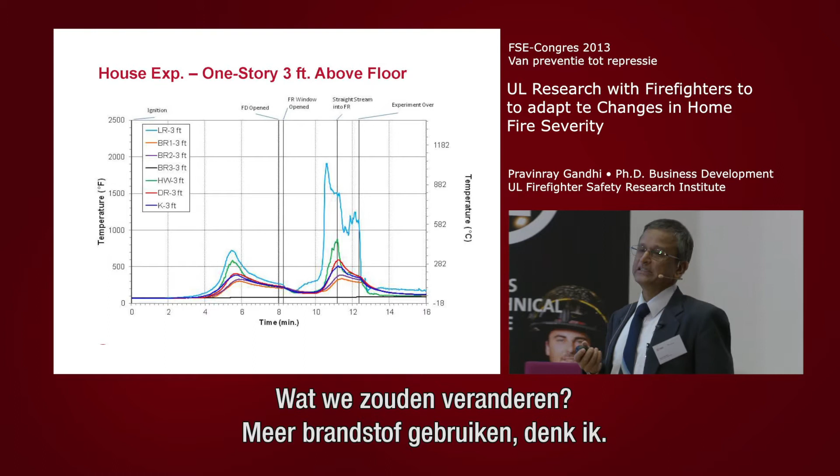What would you change to create a backdraft in this scenario? We could. We have not. What would you change? I think we might add more fuel, so you get more combustible gases in the upper hot gas layer. That could be one way of creating a backdraft. You probably need a slightly larger space. Some of the rooms are small, so we might do this experiment in a larger space so that you get that mixing that Bjorn was talking about, and that would create a backdraft. Okay. Yeah, it is very tricky, by the way, to create backdraft unless you have an experiment designed for backdraft. Okay.

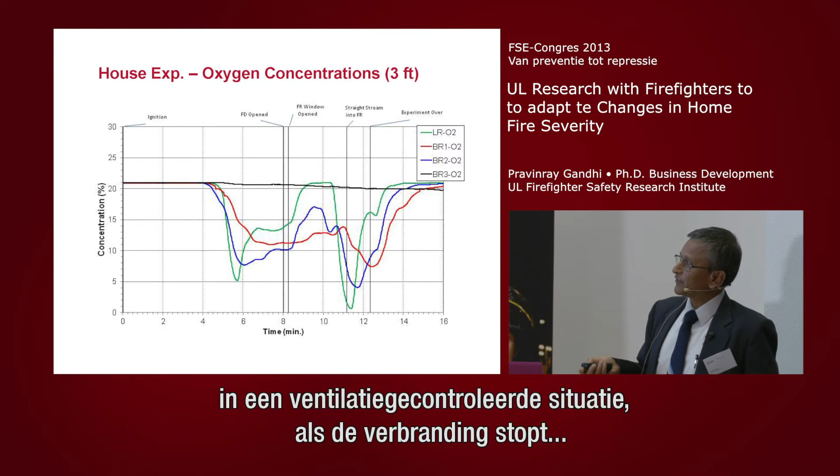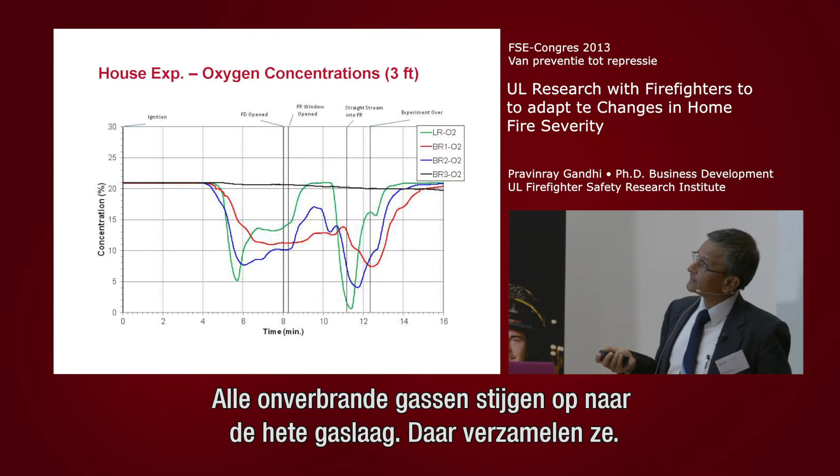Okay. We talk about oxygen concentrations. As I mentioned before, you might typically find when you have ventilation deprived conditions and the combustion stops around here, about 5 minutes, for example. You see about 5 minutes, your concentration about 5%. It's typically at that point you're not able to sustain combustion. And so basically it's smoldering. There's still a lot of heat involved. So it's still degrading and decomposing, but it's not flaming, it's not combusting. So all the hot unburned gases are going up in the hot gas layer and accumulating. And once you open the window and affect ventilation, the oxygen concentration goes up, and then you have flashover conditions.

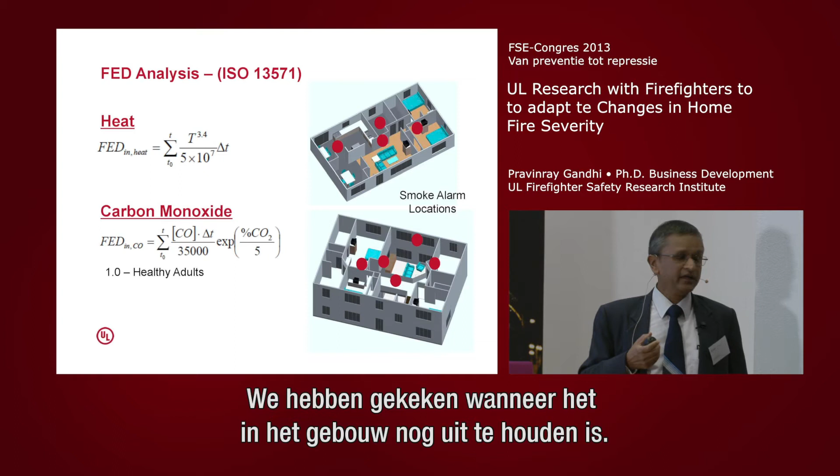One of the things that we've done as part of the exercise is to understand the tenability inside the structure at various times, and we use the ISO 13571 model for heat and for carbon monoxide to understand how close to tenability fire service people may be when they're doing their various rescue services. So we look at different areas in the room at different times to understand what the fractional effective dose for heat and CO would be.

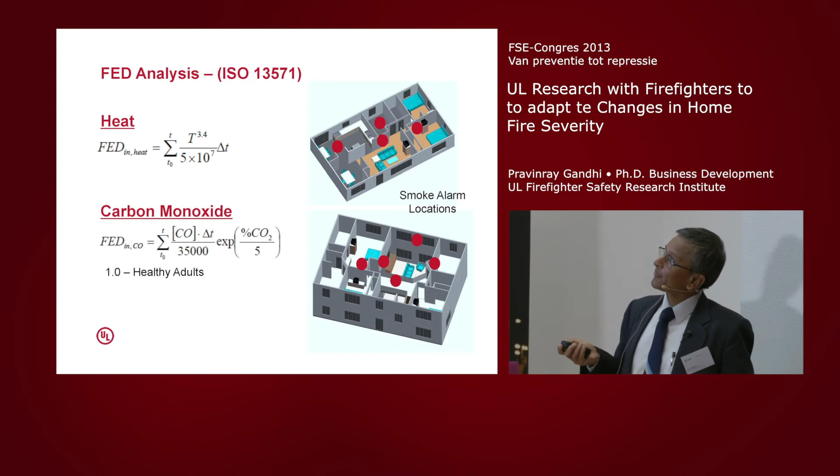We learned quite a bit from these experiments. I would say that one of the biggest takeaways for us has been to really create repeatable experiments. I think if you do one experiment, nobody's convinced by it. So in this series of experiments, we always try to repeat 1 or 2 or 3 experiments just to show that this is a repeatable phenomenon. And when you show that, that's when you see that the fire service people get buy-in into the results you're obtaining, and they're willing to express the results to their own fire service people for training purposes.

So I'm going to show you a small video of feedback that we received from the fire service.

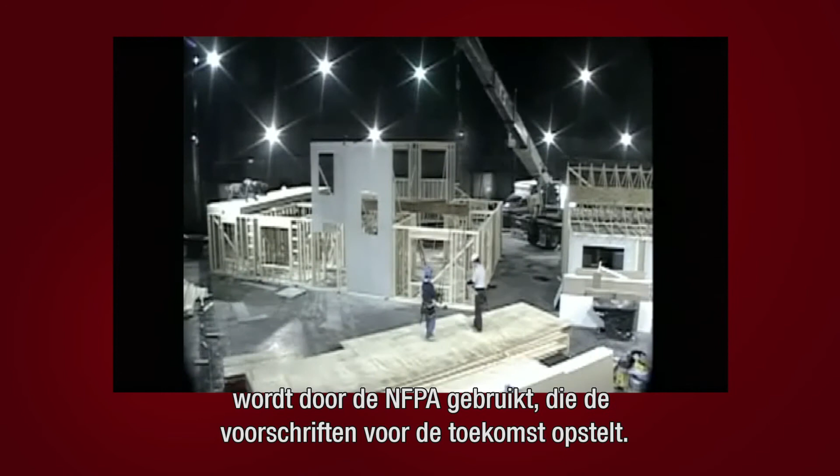The modern fire today, UL is looking at the fire service and saying, how can you do your job better, safer, faster, more efficient? The burns and the technology that's coming out here and the information is being used at the NFPA. That's going to write the codes for the future. They're looking at the way that building codes are developed, the way building codes are put together. We're kind of selfish at the fire service, that we're looking at this saying, how can we be better at the fire side of this? But you can see the group of folks that are here. It's a diverse group that's looking at public safety. And if you think about that, this is about Mrs. Smith and her family. And if there's a fire in their home, what things can we do to make it survivable for them? How do we prevent a fire? How do we make a fire grow slower so that they have more time to respond to it?

Fires have changed dramatically, and unfortunately the fire service is steeped in tradition and tactics that were born out of the 70s that have served us extremely well as far as ventilation, the effects of ventilation, how we ventilate, when we ventilate. They are still being carried out on the fire ground today. Unfortunately, the environment has changed around us, and at times our tactics don't assist us in the ways we think they're going to. The challenge is it's still working, right?

If the environment changes, if the rules of the game change, if the built environment has changed so much and we continue to do things the way we always did it, then we'll get ourselves in trouble. The name of the game is to figure out when that old stuff still applies and when it doesn't, and you need data to be able to make that decision.

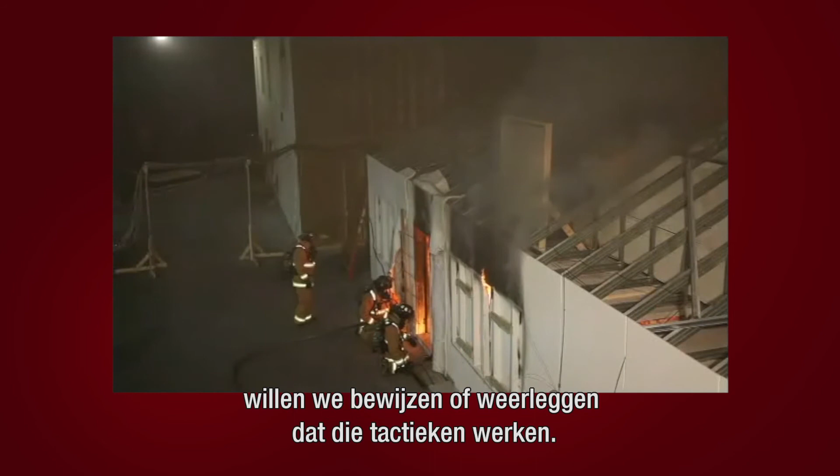Well, the fire service is notorious for traditions, and a lot of our information is passed down through textbooks and just through generational person-to-person transfer. One of the things that we're doing with these tests is proving or disproving that some of those tactics were correct. Like for years we've taught that a 4x4 ventilation hole is the perfect size.

Well, now we're trying to put the science to that to determine maybe it is. Maybe the information was correct all along, or maybe it's only applicable in certain situations and we need bigger holes for newer fire loads or what have you. So it's proving that some of the things we're doing are correct, and it's also giving us new information to expand our tactics.

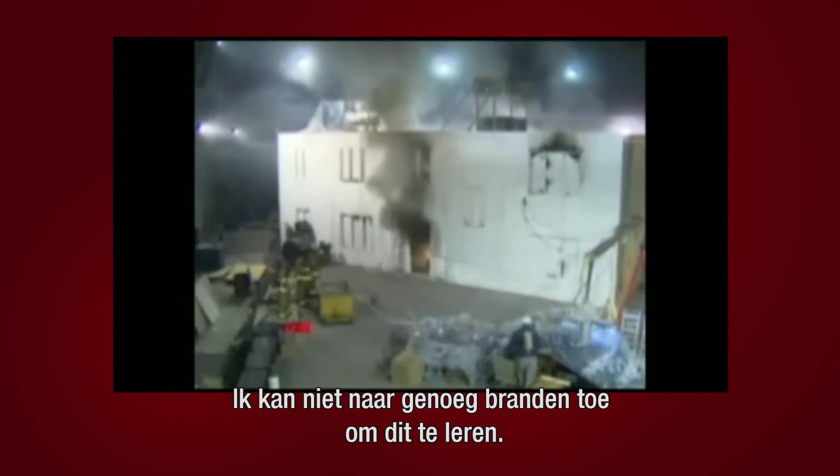UL is providing us with the information we need to do our job in a modern fire environment. I couldn't convey the lessons I'm conveying today in the classroom without this information. My experience didn't teach me what I'm learning here today. This is the only place I can learn this. I can't go to enough fires to learn this. I just can't. And so if we don't have access to this kind of information, and we don't have it packaged the way it's packaged, then we can't learn our job.

My ability to make command decisions on the fire ground has been increased tremendously by the exposure I've had through this testing. My decisions are more concise, more directed, crisper. I can react and implement strategy based on the knowledge that I've received in this controlled environment where I'm not going to endanger members' lives. I'm learning here things that might take me years on the fire ground to learn and understand.

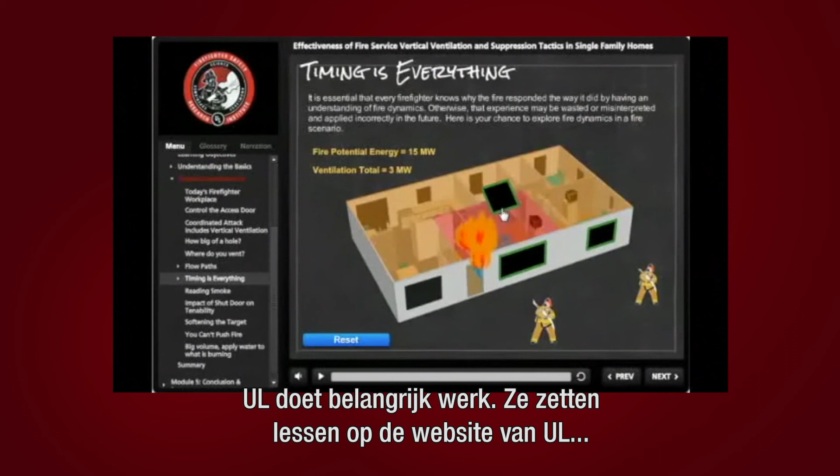Research is great knowledge, but the fire service benefits when we can get that knowledge out to the fire service. And I think an important role that UL has done is creating the educational pieces on the UL website so our fire companies can watch at their own pace, start to learn what their work environment is and how it's going to perform. They've also gotten their members out to the fire service at different functions to deliver that message and the data that they're collecting.

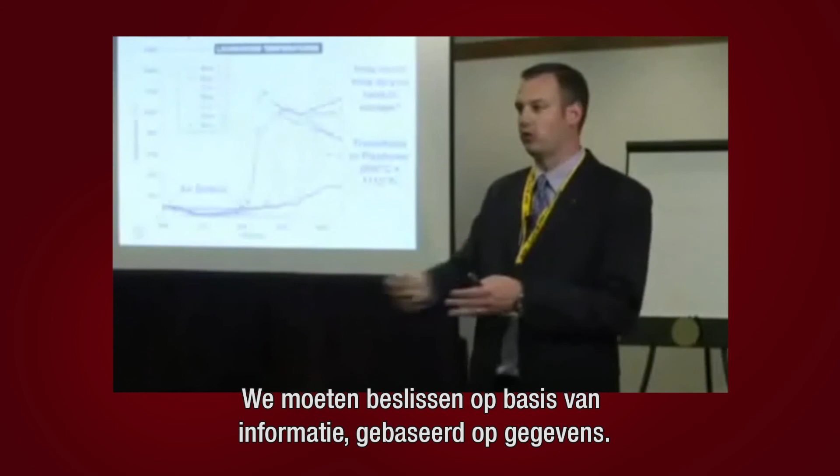Because we're seeing that our tactics are going to have to change, that we're going to have to make informed decisions, and that information has to come from data that's research driven. And I think that's going to give our members the ability to make good decisions on the fire ground.

Okay, the reason I wanted to show this video is that it's a discussion about how we are translating what we're doing back to the fire service. The people you saw in the video are really the people who are doing it. We are getting a growing army of fire service people who are volunteering to take the studies we've conducted and talk to their own people about how they want to make changes. Because we at UL cannot make those changes. That has to come from the fire service themselves.

And we realized that it was very important to develop a very credible base of data. Once the data is developed, we need partnership from the fire service to get it translated into practice. They can adopt the knowledge we generated so that it suits their situation and their practices. And they can then watch their practices and see if they're getting improvements in reduction of injuries and fatalities. So that's the story.